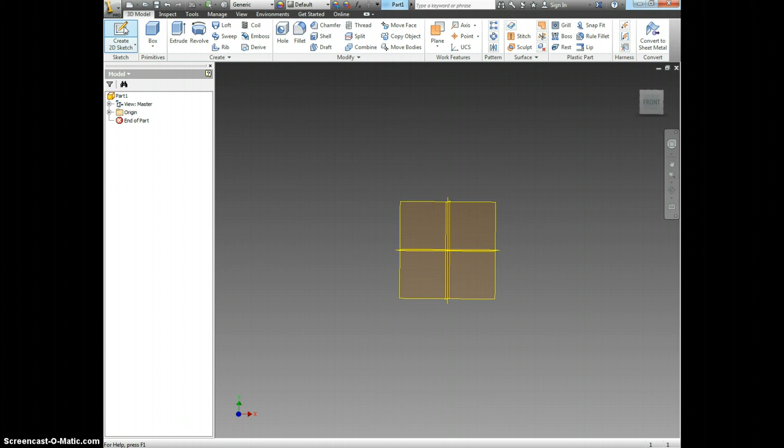We start by clicking Create 2D Sketch. And then I'm going to draw my flashlight standing up, so I'm going to click here. Now with the Revolve command, we're going to start from the dot just like we always do, and we're going to draw just half of the flashlight. So I'm going to split the flashlight right down the middle, and draw what it looks like from the side, just half of it. So I'm going to start by drawing the height of the flashlight.

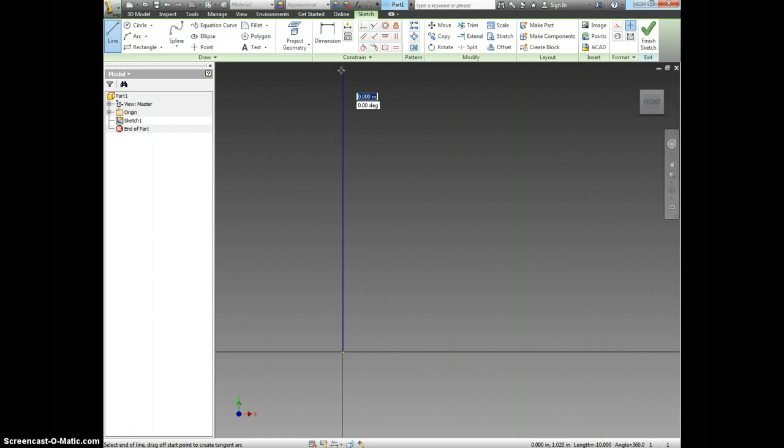And I need to dimension it right now, that way I don't make any mistakes when I'm trying to size it up. Now I couldn't find any dimensions on this flashlight, so I'm just going to make my best guess and say that the flashlight's probably about 7 inches long.

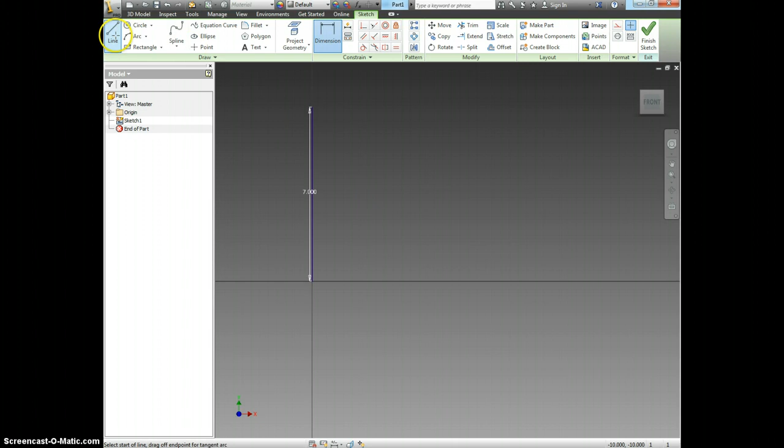Alright, now to drawing the profile of the flashlight. Line, and I'm going to start at the bottom and work my way up, because that's how I like to do things. So we start by drawing the bottom battery holder piece, just drawing that little nub there, and now I'm going to come up and draw the hand grip. So up a little bit, over for the hand grip, and then up.

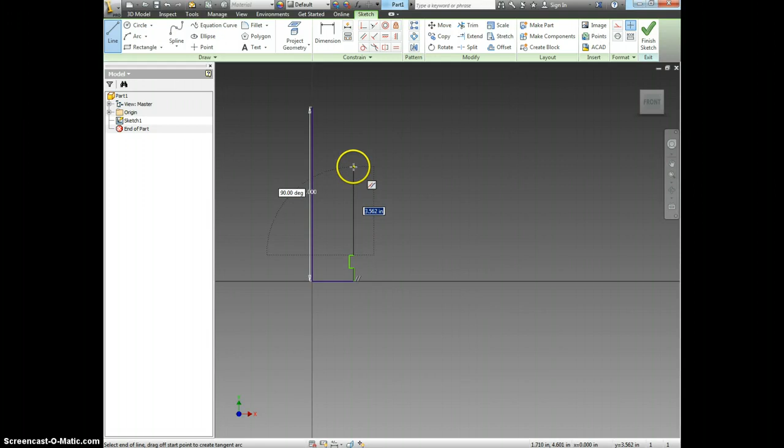I'm going to guess the hand grip is about 4 inches long because the average male hand is 4 inches. And then I'm coming in, I'm going to draw the section where the button is. And I need to draw out at an angle.

And then this rib piece here could be really tricky, so I could do this a couple different ways. I could come in and draw a bunch of little arcs. Let's zoom in on it. If I really want to make this look good, this is what I'm going to do. And I'm going to use this equal so that these are both equal. And draw one more.

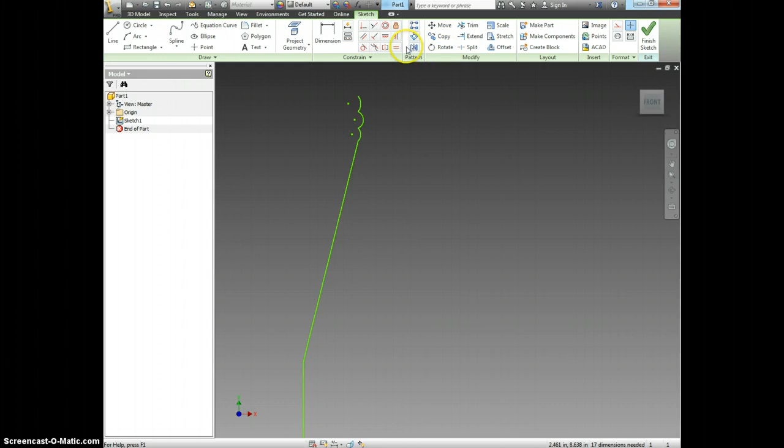See, I'm not liking how these look. So let's see if I can go ahead and make these all equal. And it's not going to like what I just did there. It says I already have that constrained. I'm going to say OK. I don't like that, and that's OK. So I'm just going to delete it and redraw it.

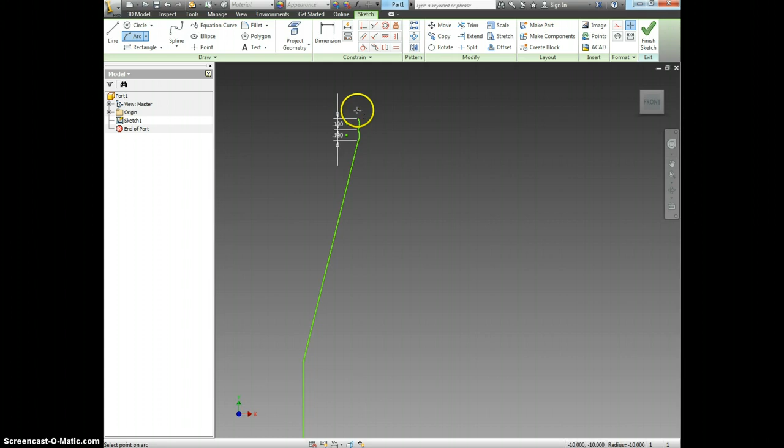And this time, I'm going to come up 0.1 and hit enter, and then click up again, 0.1, enter, and click up 0.1, enter, and then click. And so now I have 3 bumps that are the same size.

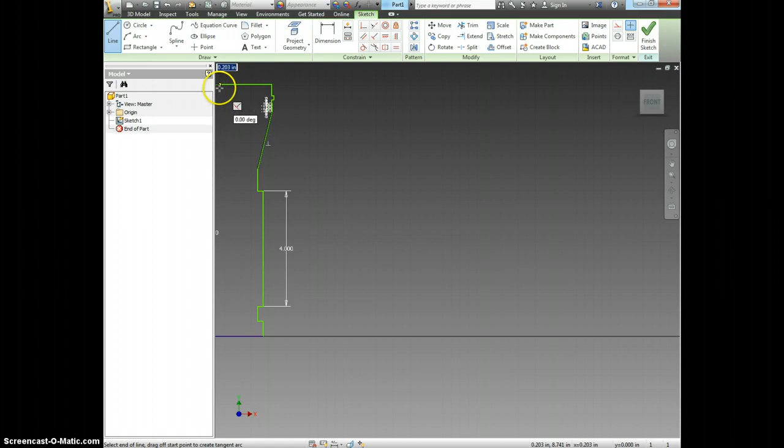Now, as we look at this, we see that 7 inches might not have been the best guess, because if this was 4 inches, this needed to be a little bit taller. So I'm just going to delete it, and now I'm going to connect from here to there. And if I want to, I probably should dimension this line here to say how big it is. Now if this is 4 inches, I'm going to guess this whole flashlight's probably about 2 inches wide. So we're just going to click and make that 1 inch, not 2 inches, my fault, 1 inch.

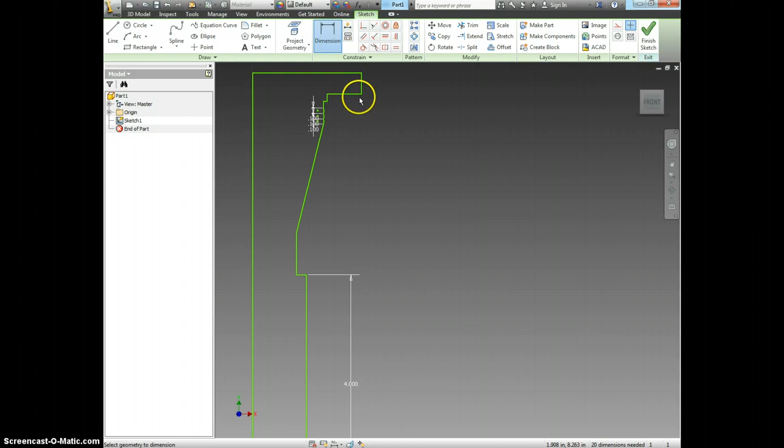And here we go, we're looking at this. This doesn't look right, so I'm just going to delete it, and I'm going to redraw it. Notice that when I do these things, I don't worry about if it gets messed up. If it's wrong, I delete it, and I try again.

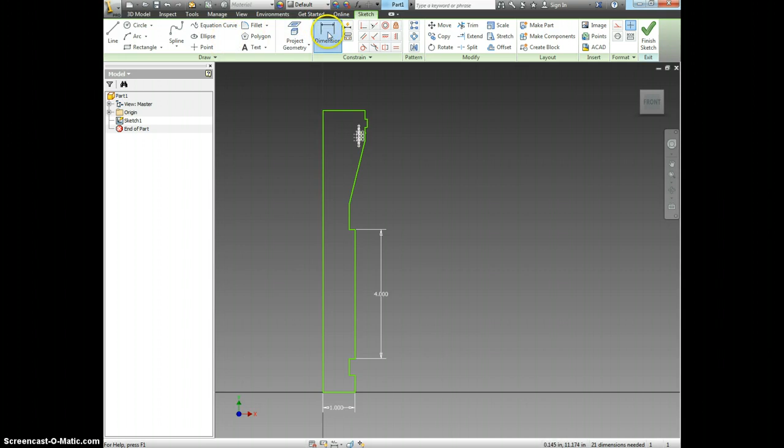Now this is my little cap, and I want to extend it. There's this extend command right here. You can click on it, and up it goes. There you go, I have the side of my flashlight. It should be from here to there about 8 inches. Oh, it didn't like that.

So I could do a couple things here. I could change some dimensions here. Let's start with doing that. I'm going to make that, instead of 0.7, 0.5. Yep, I like that. Let's see what happens if I make this 8.5.

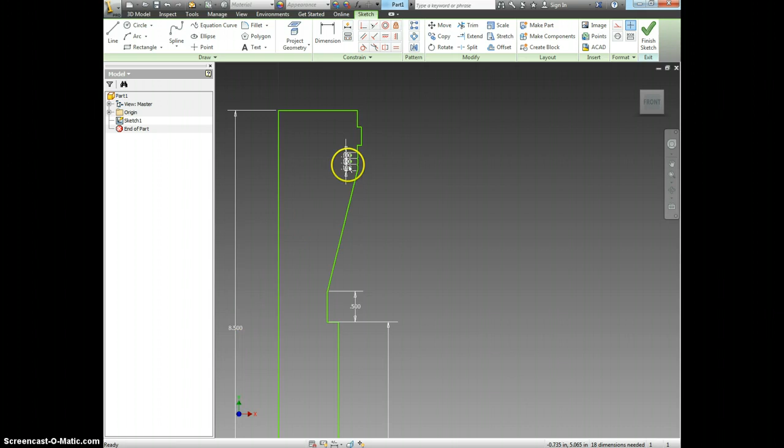I think I'm happy with that. I'm going to hit Finish Sketch. I'm sorry, I don't want to extrude it, because look what happens when I try and extrude this. It comes out flat, and that's not what we want.

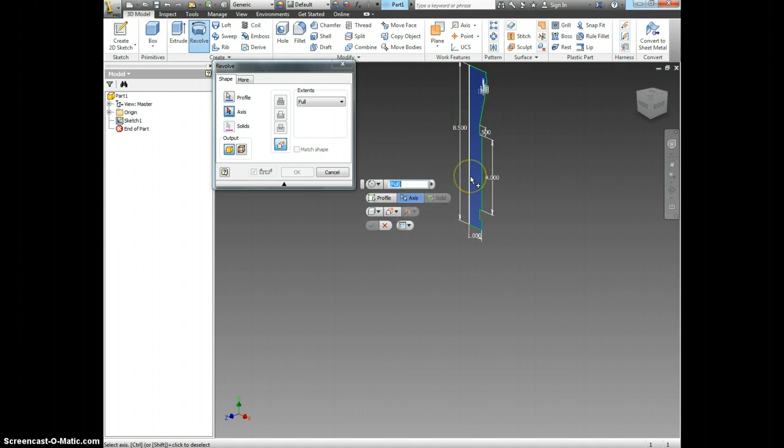We want it to spin. So you click Revolve, select the profile that you want, which is this one, and then click the axis that you want, which is this one. And now we revolve it, and we say OK.

Now I have a flashlight. That's a pretty good flashlight. I would be fairly happy with that.

Now, if we want to make it look just a little bit better, we come into Revolution, and we turn it to black. As soon as it pulls up, here we go. Where is black? There we go. So now I have a black flashlight.

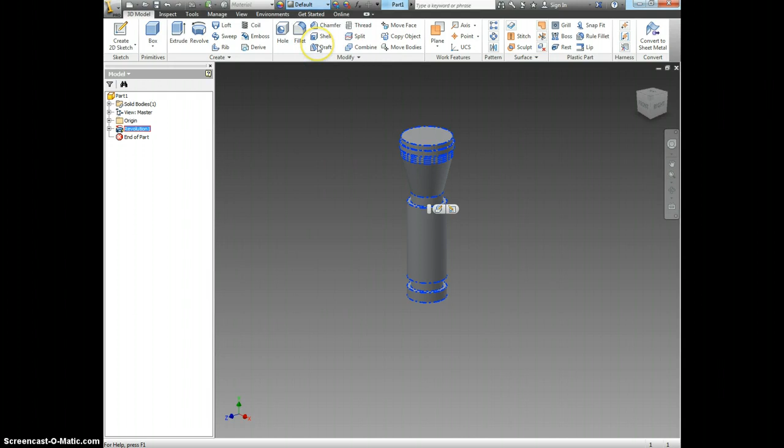But let's see if we're missing anything really. Oh, we're missing a lens. So I'm going to try and cut this part out here, and we're missing buttons. So let's go ahead and try and put some buttons on.

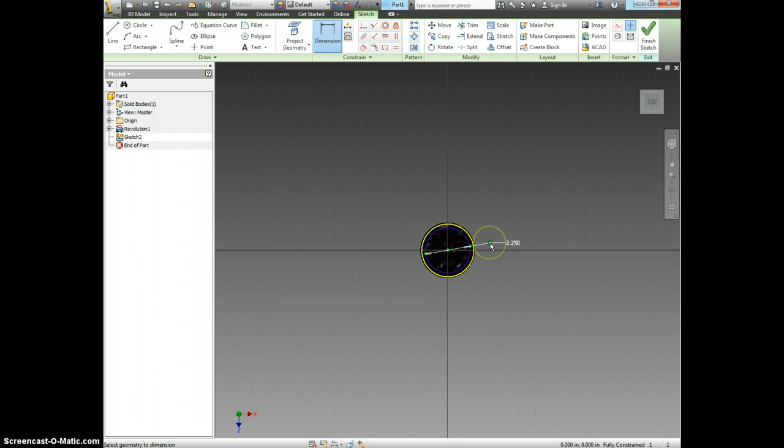First, we're going to click Create 2D Sketch. We're going to go right here, and I'm just going to draw a circle and dimension it. Right now it's 2.23. I'm going to make it 2.25 because that's a round number that's close to 2.23.

Say Finish Sketch, and now I'm going to extrude and we want to cut. We're going to cut down, just a little bit right here, probably about 1/4 of an inch. So we'll type in 1/4. This is where those measuring skills come in handy, because when you learn the size of things, then you can estimate it.

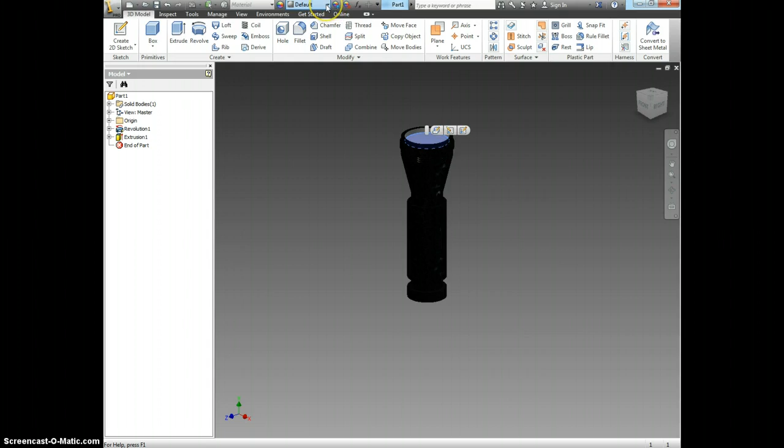Now we're going to change this to, let's change it to something clear. Clear light. I like that. And there we go. So now I just need to add a button in.

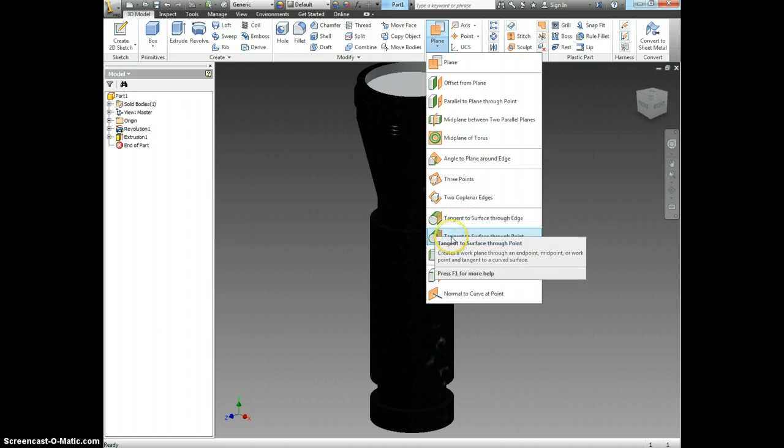Now adding the button is going to be a little bit trickier because these are round edges. And so there's only a couple ways you can do that. One way is you can add a work plane onto the surface of this. To do that, you have to use tangent to surface through edge or tangent to surface through a point. So what we're going to do is tangent to a surface through a point.

We're going to click Create 2D Sketch, and I've got to make a point first. I'm going to click on this edge right here because that's where I want my point. I'm going to send it back to the home view so I can get a good view of this.

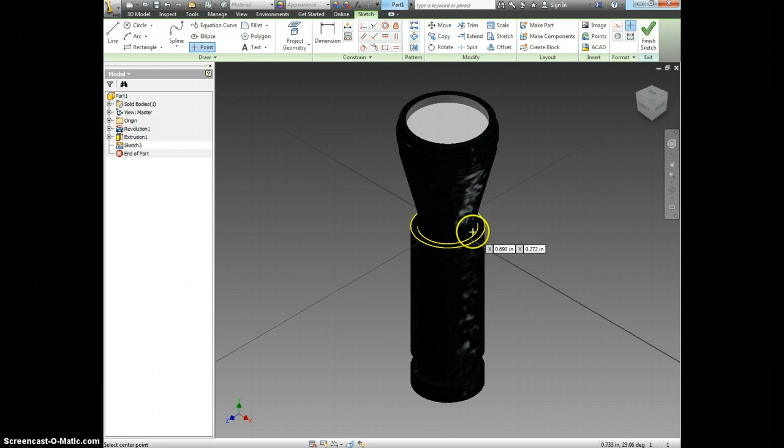Right here is the point command. I'm going to click on point, and I'm going to say I want a point right here. And you can see there's a little green dot. That is my point. Say Finish Sketch.

Come back up here and click on Plane and tangent to surface through a point. So this is the surface I want to be tangent to, and this is the point that I want it to be tangent to. So now I have my work plane, and I can create a 2D sketch right here.

And I can draw my button. Now you can see here, because I did not do a good job of planning, my button's not going to be super big. So that was a mistake on my part, that I didn't draw my button bigger. But we're going to go ahead and move on for right now, and I'll fix it in just a minute.

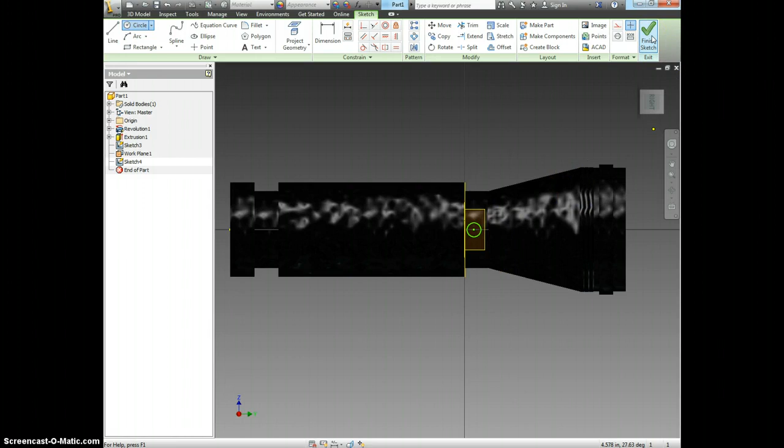So Finish Sketch, and when we want to change a sketch, we come over to our browser, and we can click right here, and then double click on the square where it says Sketch 1. And now, instead of making this 1/2 inch, let's make it 1. See what that does for us.

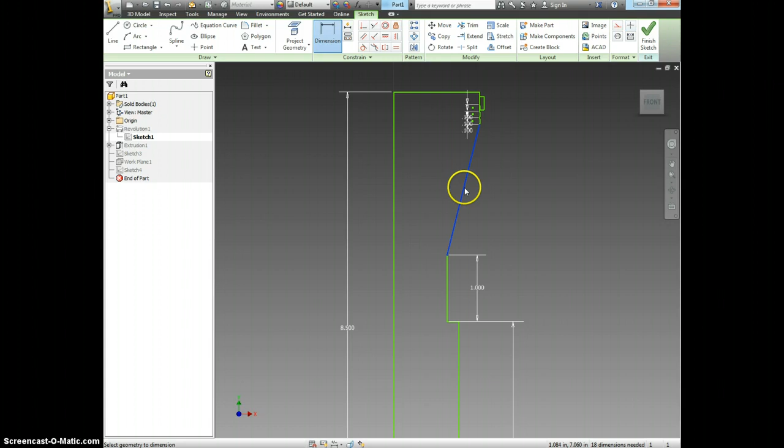And that pushed those things up. So let's change this dimension. I'm going to click it a second time and it'll bring it out at an angle. 2 seems too big. Let's make it 1.5 and see what that does. That doesn't look right. 1.75?

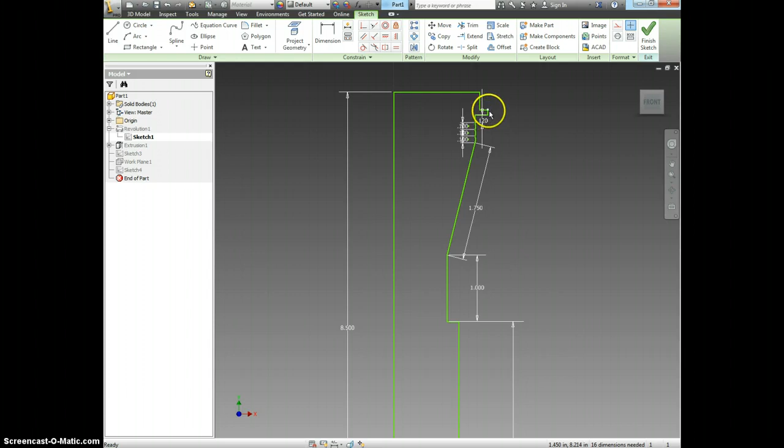That looks better. Now I've got to come in and dimension this, and 0.12 works for that. Let's dimension this line right here and get that the right size. Let's make that 0.25. There we go.

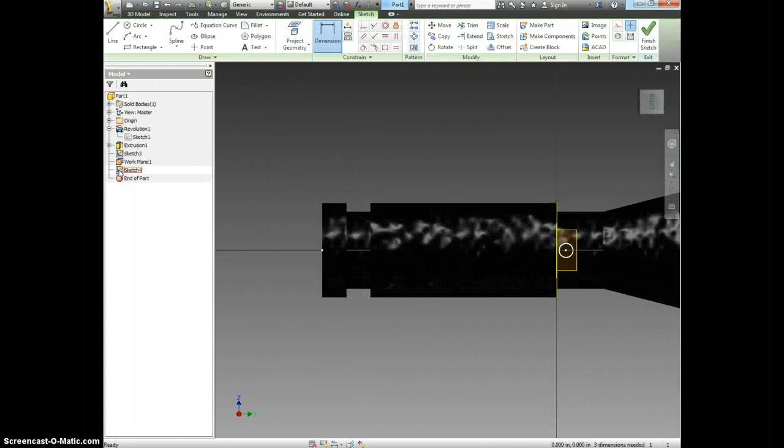And now we have our flashlight. Looks a little bit better. And I can double click back on this sketch and edit it. I don't like where that circle is anymore, so I'm deleting it and redrawing it.

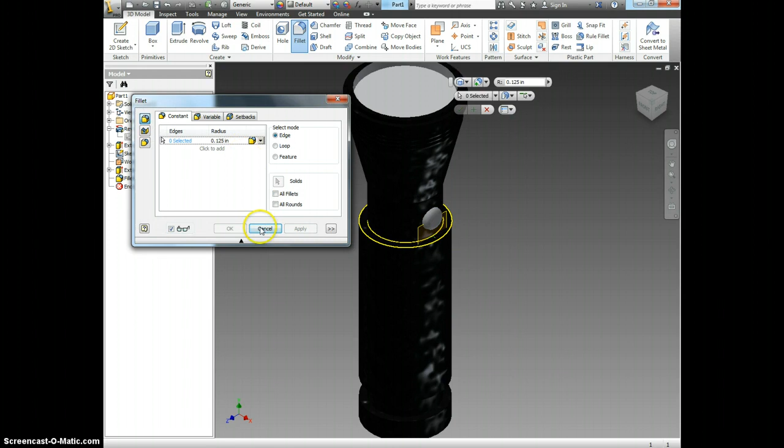Finish sketch, extrude, and then I can click out. But look at this, I can do it both ways to make sure my button goes in and out. I'm going to say OK, and then I'm going to use the fillet command to round this edge just slightly, because we don't like a sharp button.

There we go. And now I have my flashlight. It's perfectly done. At this point, I'm going to make my work plane and this sketch invisible. So I right click, click on visibility, and they disappear. And so I get rid of anything that makes my, oops, clicked on the wrong one. There we go. So this is my final flashlight.

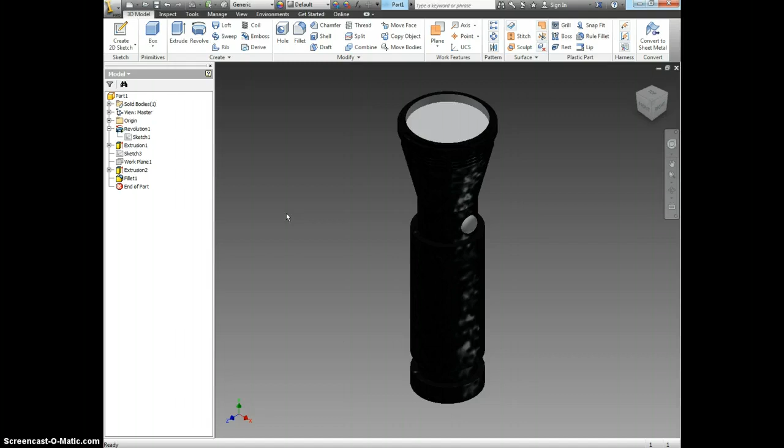This is an excellent flashlight. Not exactly what we're expecting from all of our students. If you had stopped at drawing just the flashlight, just this right here, we would have been very happy with that. We would have looked at it and been very, very pleased. It would have been a 9 out of 10. Adding the button just gives you a little extra.

And you notice that I've still not got all the details on here. Let's not worry about putting all the details. We're just learning how to use Inventor. So, there you go.